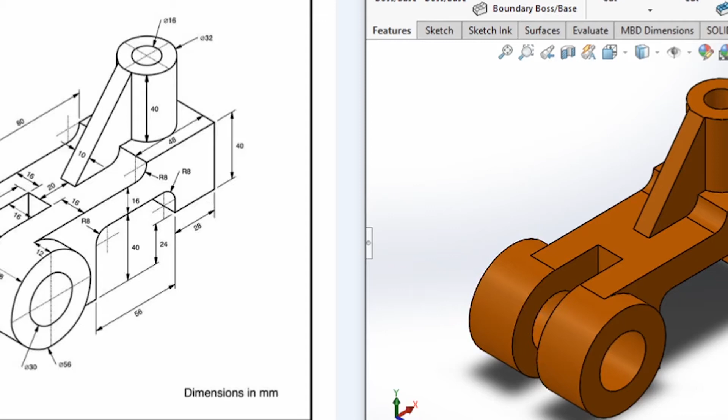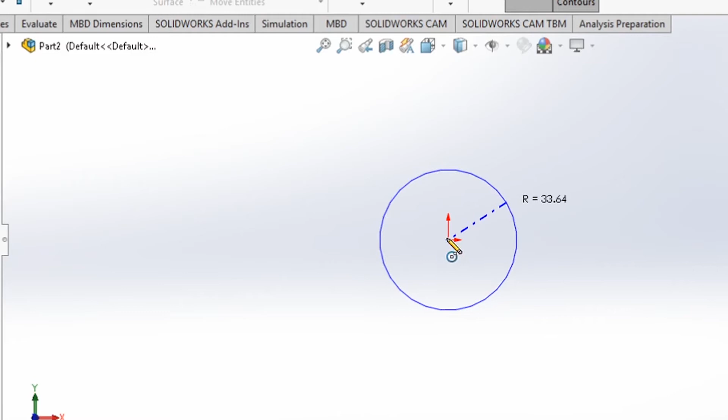Right, so let's dive into this model then and have a go. Okay, so the first thing I'm going to start on is this front plane here. So I'm going to take the front plane and I'm going to sketch on there. And I'm going to use my origin here for starting off with the circular end. So I'm going to click there and I'm going to drop two circles on this origin here. And let's dimension them up. So the first one is going to be 56. And the second one is going to be 30.

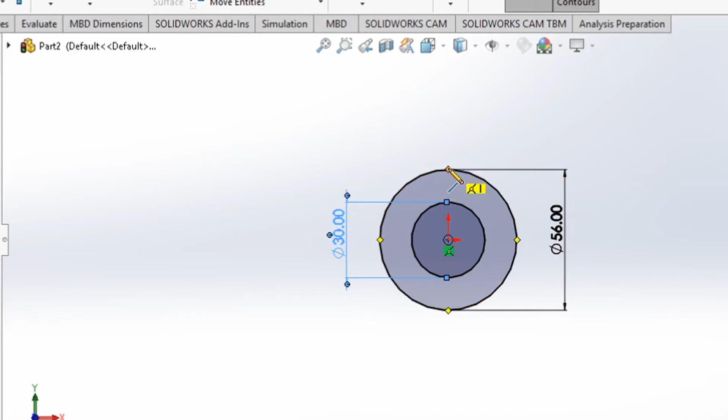Okay. So we've got our two dimensions in there for our circles, and they're going to be our sort of starting point. That's where we can start off from and give us our guidance to create the rest of the shape. So the next thing we're going to do is go to my line tool here, and I'm going to start coincident to the top of this circle and draw a line straight across. Now I know I have some sizes. This is going to be roughly 80 long, but we will change the sizes as we go. So I'm just going to drop a line in there.

Then I have a curvature. So this line here, if I bring it back to the end of the last one, I'll get like a tiny little yellow triangle around that end. Now I'll pull it away and it will now turn to an arc. So I'm just going to drop an arc in there. As I move the line away again, it will go back to a line, and I would need to return back to that end, turning back to an arc again. And I'm just going to sketch out the shape that I am after.

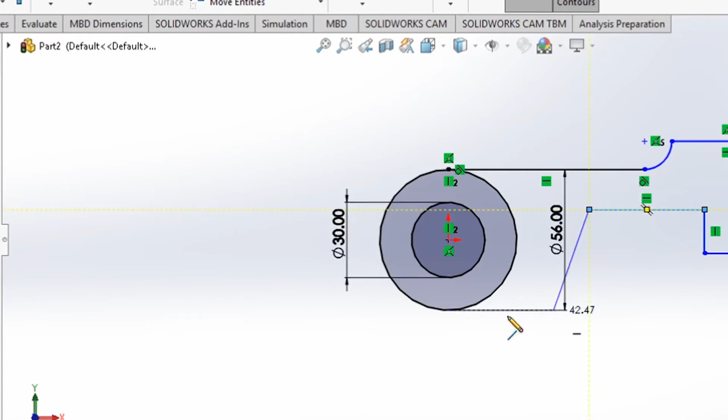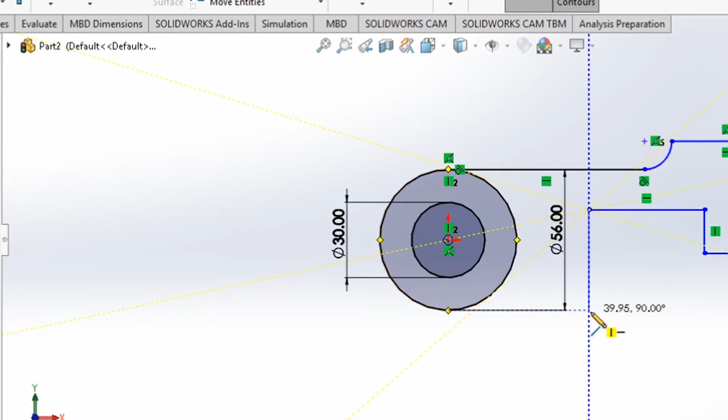So here I want this line at the bottom here to be in line with the bottom of this. So what I'm going to do, I'm going to take the end point, hover over that coincident point on the circle, move along here, and you'll see the dotted blue line comes with it. That's just giving me a guidance line.

Now, if I just show you that again, but if I get rid of that dimension line over to the other side, so you'll be able to see it easier. So if I put another line in there, click on the end of there, go to the end coincident point on that circle, drag across, and you'll see that prediction line, keeping it horizontal at the end. And then I can just join them up there. Okay. That's given me that rough shape, so now let's put some sizes to this.

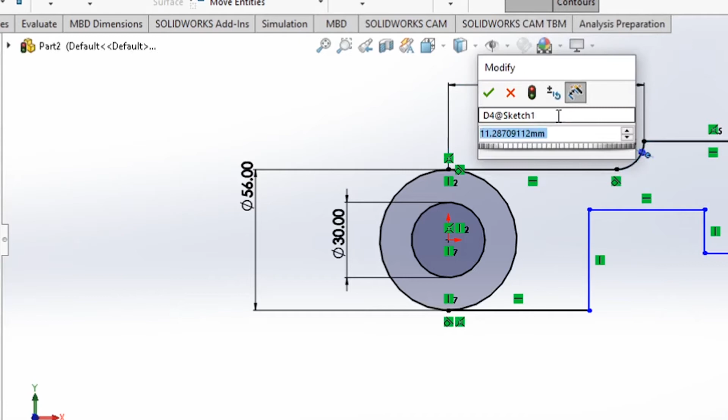So first thing I'm going to do is from that top point to here, I'm going to go to 80 long, and this arc, this radius here is going to be 8 millimeters, so I can drop that down. Now my next distance is going to be across, and it's going to be from the centre of this arc here to the end here, which is going to be 48mm.

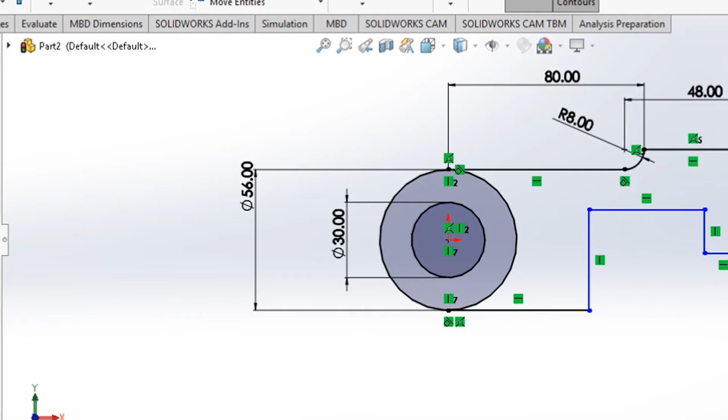And then coming down 40, and I'm going to come back inside 28, like so. Now the gap from the top to here is going to be 16, so let's set that as 16. And the distance across from there to there is going to be 56.

Now there are two little bits that I missed off, and these are these arcs here. The reason for that is because these last two, rather than keep changing between line and arc, I can just add in with a fillet. So I'm going to go to the fillet tool, change that to 8, and I'm going to click them two inside corners there. And if I tick that, you will see I get that 8mm fillet on either side there, like so. Okay, so we've got that far.

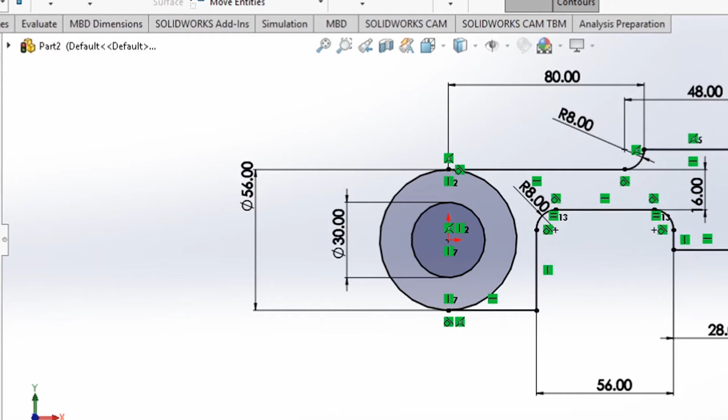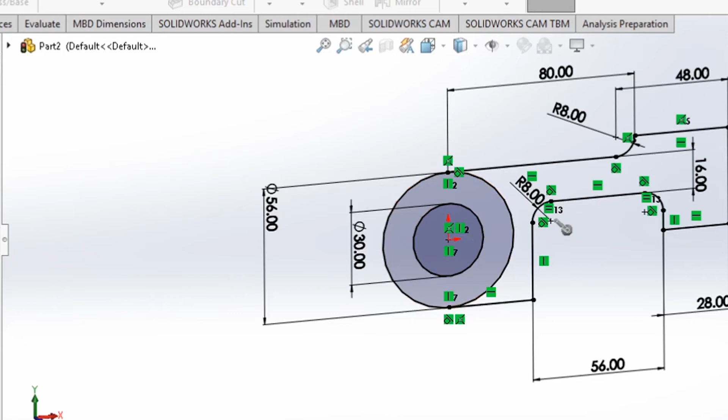Now we've got that sketch in place. This sketch here is two parts. It is this back section and this front section. We would call these two different regions. So when I go to features and extrude this, it's going to ask me to identify regions or contours. So this region here is my front contour, and I'm going to select that in this box at the bottom here.

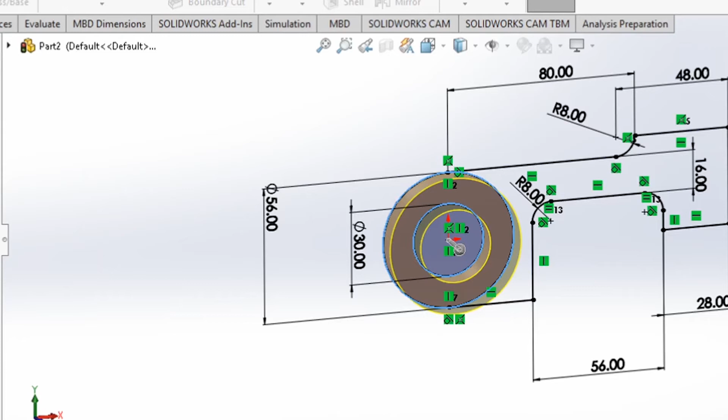Now I need to specify the size that that's going to be extruding out by. I'm given quite a few sizes on the drawing. I can do it quite simply. So I can say that I've got 28 plus 28 plus 16, and if I press enter there, SolidWorks will work that out for me, so that's 72. Now this is coming out 72 in one direction.

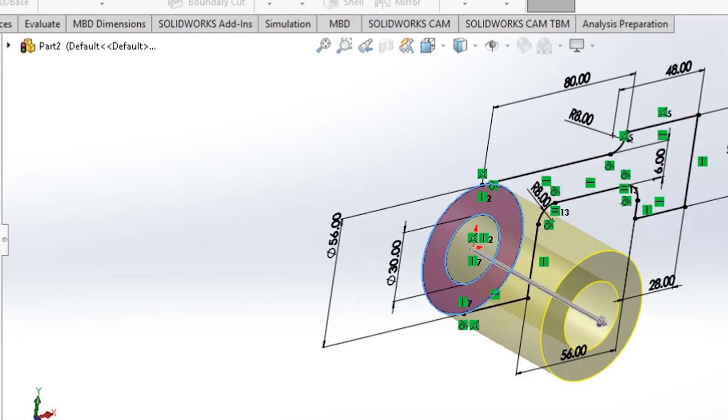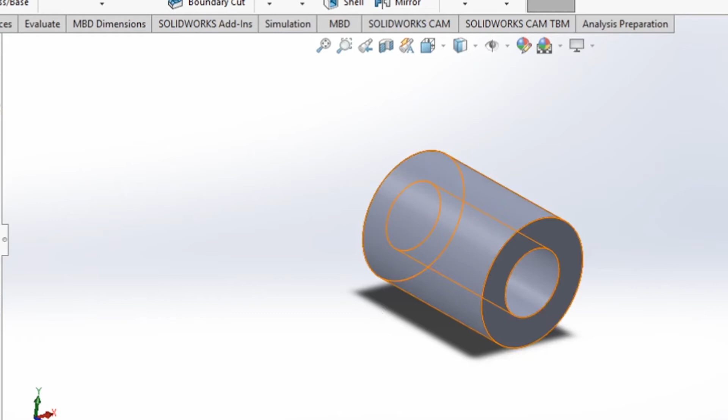What I want it to do is go from the mid plane out in both directions. If I go to my direction option here, my end condition, and I go to mid plane, it will go out half of that amount each way. And you tick that, and I've got that now, that circle, or that cylinder effectively. The issue with that now is the sketch has disappeared behind. So if I drop down the arrow next to my extrude that I've created, underneath it I can click on the sketch. That will show me that sketch that I created originally.

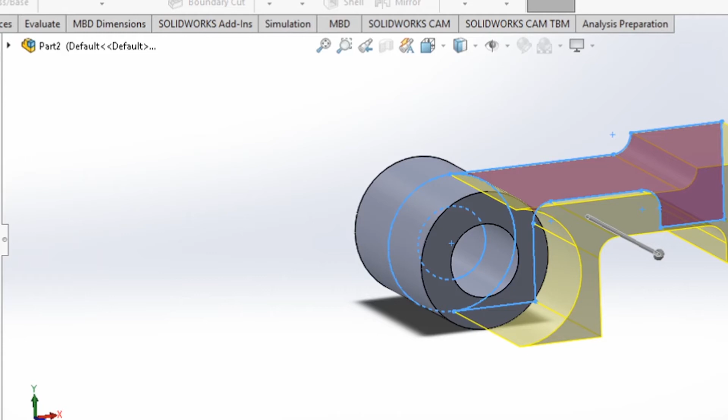Now I've clicked on that sketch, I can now go to extrude again, select the other contour, this back section, like so, and I can now put in the sizes that I need for that, which is going to be 48. Now again, it's come out one way. I want to go from the mid plane, and it's going across that centre, and tick there like so. And I've got that general shape now.

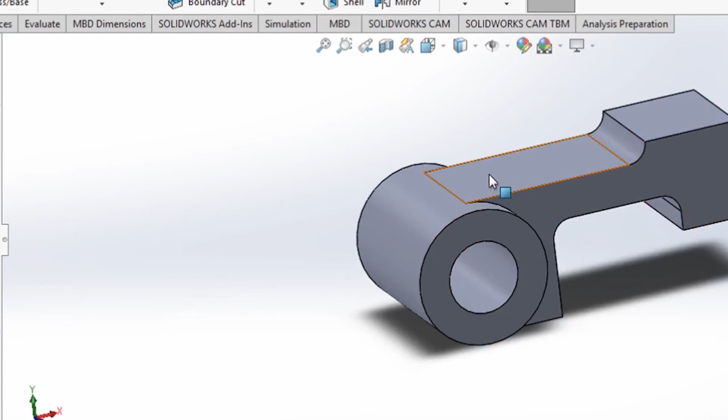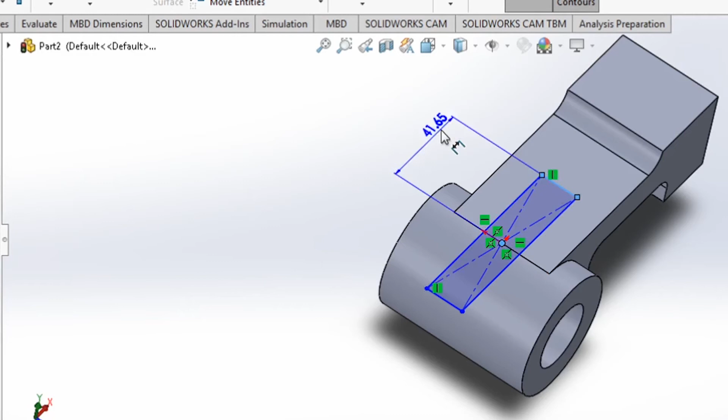So now I've got that shape, what I'm going to do, sketching on this top, I'm going to get a centre rectangle, starting from the origin point, and I'm going to drag that out. I'm just going to create a rough shape, and then I'm going to put some sizes to it. From my origin to this top edge here is going to be 28. And the thickness of this across is going to be 16, and this is going to be my cutout.

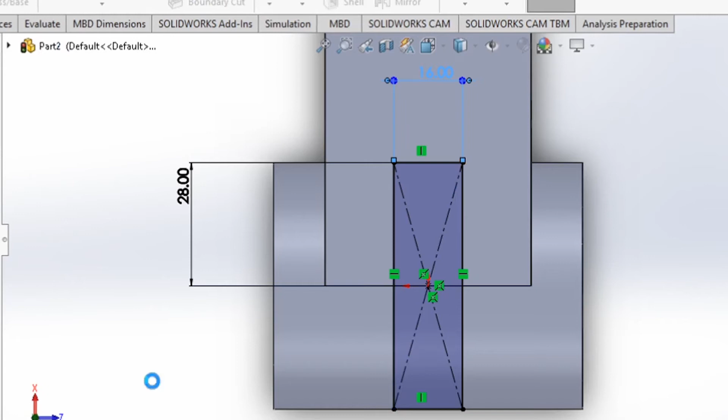So if I view that from above, top plane there, you will see that that is going to be the shape that's cut out of the top of here. So if I now go to features and extrude cut, I'm not going to bother about figuring out what the distance is. If I just change my end condition here to through all, you'll see now it's extended it down through all the material. Tick there, and I've got that cut out at the end, like so.

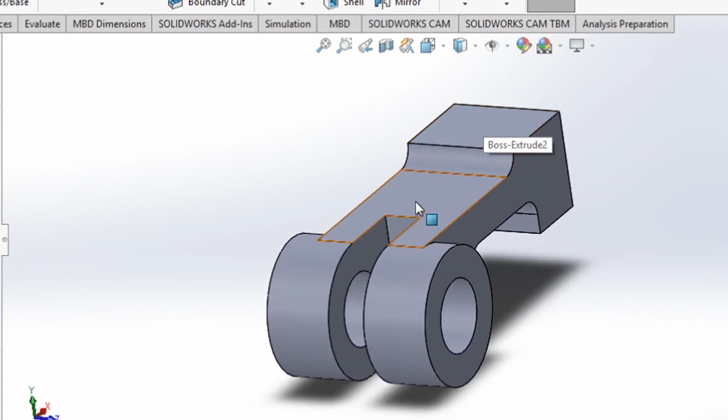So I'm just left with a couple of little bits now to add to this. I've got my cylinder to add to the top of here, and my rib to put on there. So let's add the cylinder first. I'm going to add that in this top plane, in the sketch on there. Now I want to know where the halfway point of this is, because it needs to go in the centre. So let's get a centre line. I'm going to go from corner to corner, like so.

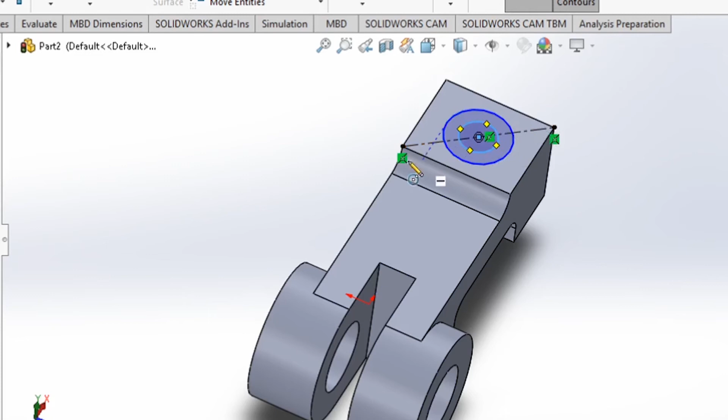And then I'm going to put my circles on from the centre, the midpoint of that line. So that's 1, that's 2, like so. My outside one is going to be 32 diameter, and my inside one is going to be 16. Once I've got them two in there, I can extrude them up, and they are going to come up by 40.

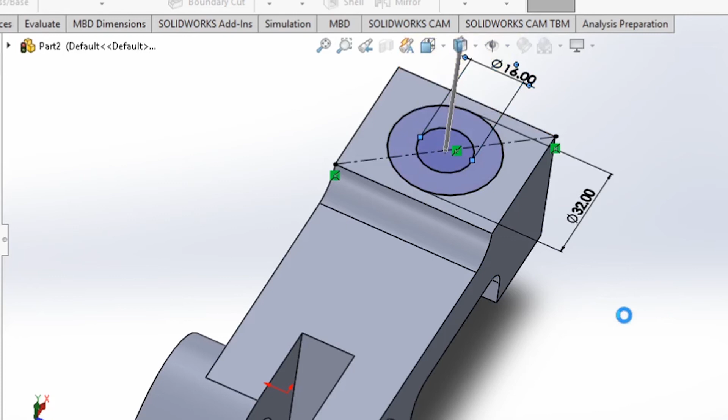Which gives me that 40mm extrude up for that cylinder. Just leaves me now with the rib to create in here. Now, the reason I offset these through the mid-plane was so that when I extruded these, I used the mid-plane option as the end condition. That meant that my front plane here runs straight through my model, as you can see there. So I'm thinking in advance of how I'm going to do this rib at the end.

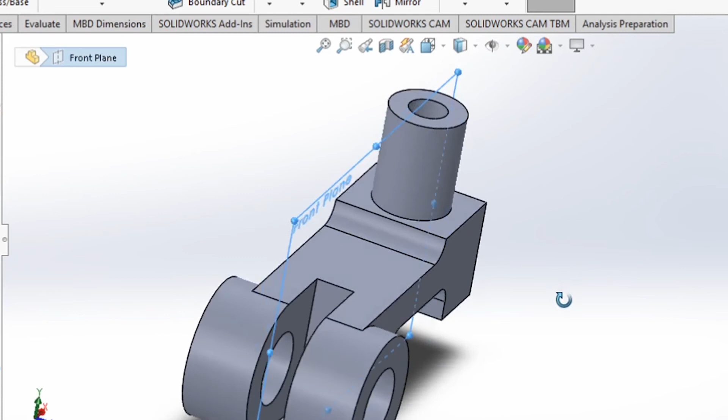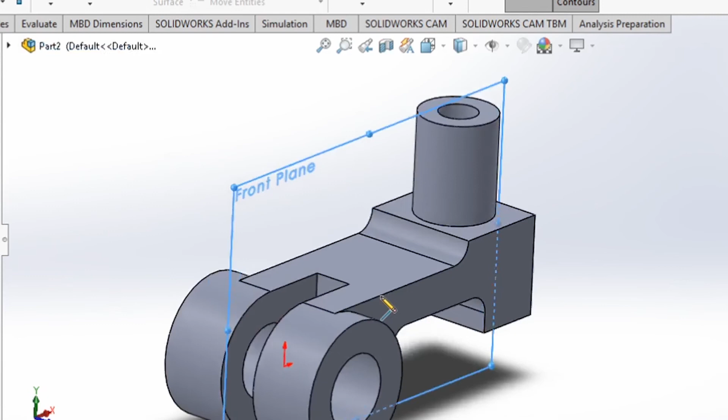It means that I don't have to add in extra planes later on, because my front plane is going to run straight through the centre of that rib. So having that front plane running straight through the centre of my model means that I can sketch on that front plane. I can put a line in, and if I turn that to the side now, so I can see from the side view, I can put a line from there up to that end point, like so.

I'm just going to pause it there for a moment, so I'm not going to draw any more lines. I'm going to get this distance that I want at the bottom. Now this is coincident to this edge line, so it'll stay on that height, but I need a distance here from this end edge through to this point. So if I go to my smart dimension, select the corner on that edge, and select that point, I can now dimension up that distance, which is 20mm. So I know that this rib is going to start exactly where I need it to.

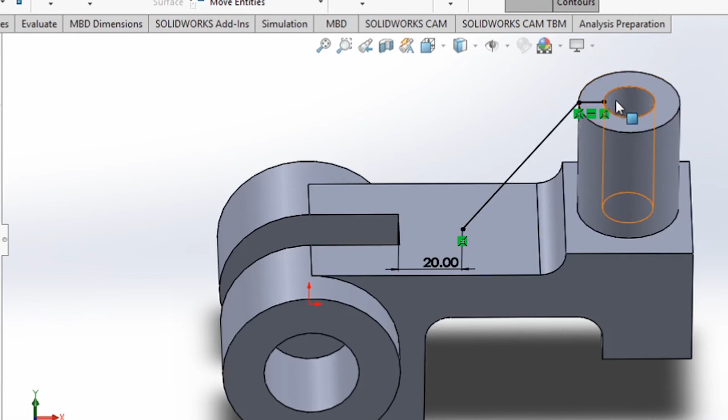Okay, I said I'm going to pause that line there. The reason I paused it is because if I try turning that into a rib, it won't work. It'll throw up an error. The reason is it finishes right on the end point of this effectively circular shaft when we're looking down from the top. It doesn't like finishing there, so what I've got to do is add an extra line in across to that inside edge. Now it doesn't matter how long that line is, as long as it comes across that top edge. I'm just adding it so it has a relationship to that point, so it's fully defined.

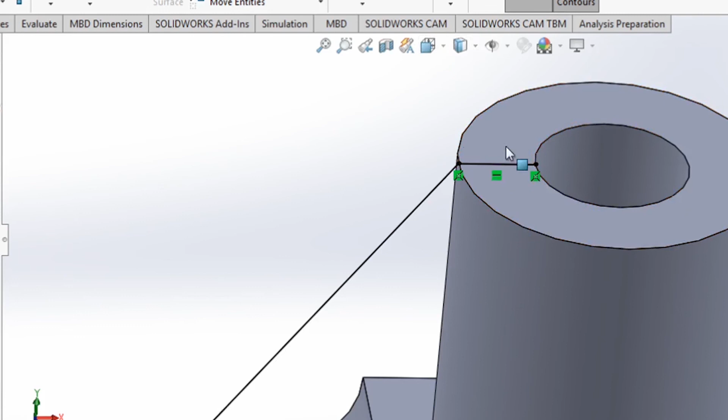Now the reason for that is, when we're dealing with these circular ends on a rib, it likes to have a finishing line. It likes to finish off on an axis. So what this is doing is it's taking my rib up and then showing it where it's going to finish off into the cylinder shape. So now if I go to the features and go to rib, it will demonstrate that it's coming up and across into that cylinder shape, which is what I am after.

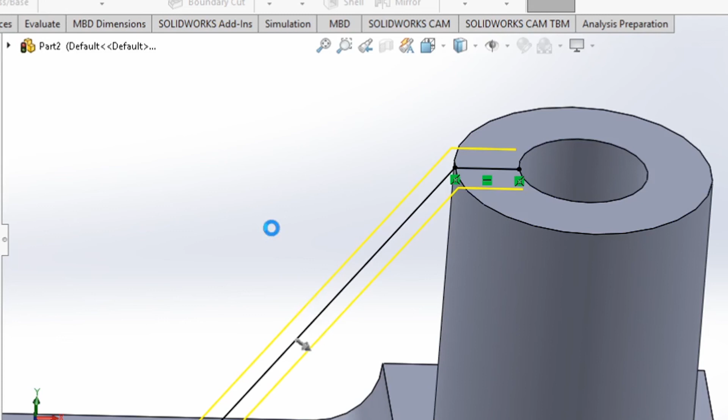I need to make sure the material's coming down into the model. I want it to be 10, and I want it to be offset on both sides. Now I could select it to be on one side or the other side, but because I've got my line going straight down the centre of my model, I want it to be offset down both sides 5mm each way. So if I tick there, we now have that rib in our model, like so. And we are looking spot on.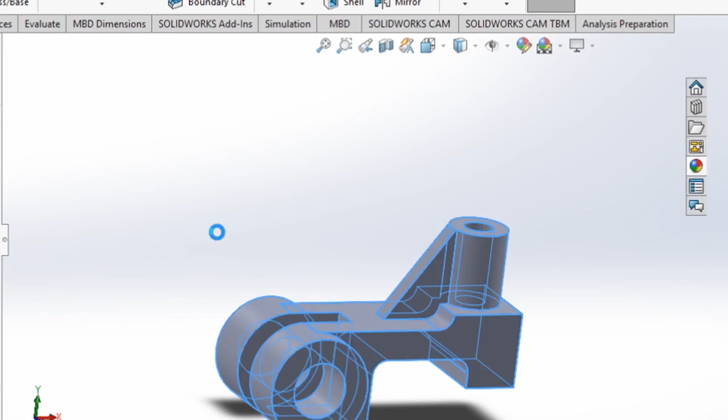So the last part of this then is just to add some sort of material or appearance. So I'm going to go to appearance, I'm going to go body. And I'm going to find a colour, I'm just picking a random colour for this, and tick there, and I'm happy with that. So now we are finished with our final model, which is our isometric component completed and fully modelled up.

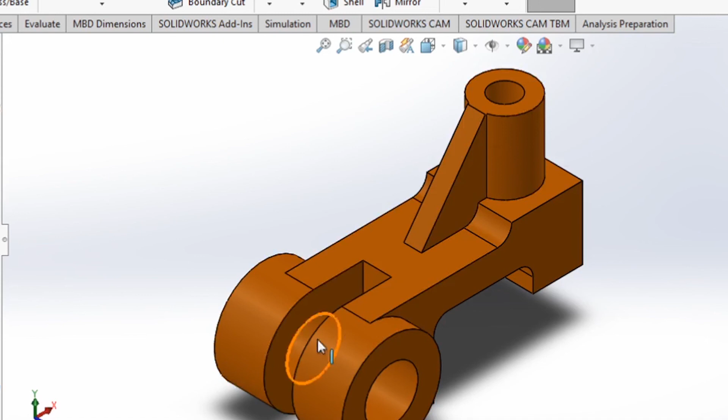Now we've been through a few different techniques there. We've used extruding through using the contours. We've looked at how we model and create our extrusions across a mid-plane so that we can keep our front plane, or a plane, down the centre of our model. We've looked at how we can include ribs, so we've looked at a couple of different techniques there. Now for those of you who are beginners, hopefully that's helped you and taught you something. If you're an existing user of SOLIDWORKS and you're quite proficient with it, that might just refresh a few little ideas for you.